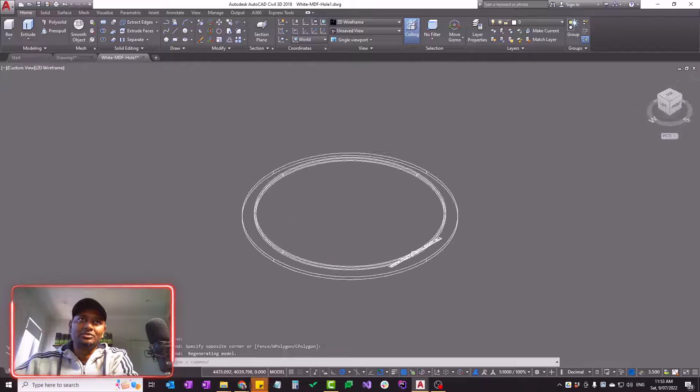So first thing is, you can see this is basically a sort of enclosure we're gonna do for one of our furniture products. Let me put it in realistic mode. As you can see, it's got a little extrusion up here that goes inside into the hole, and then this is a portion that people will see. This will be on outside, this will be on inside, and the text we're going to put should be on here, so people can see it from outside. That's what we're going to do.

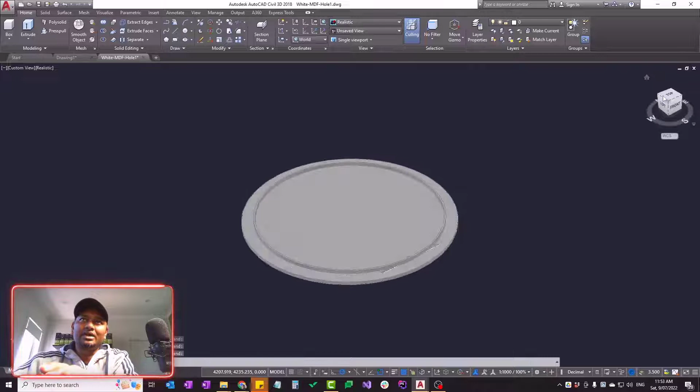Now let's go back again to top view, put it to 2D wireframe, and you can see that is a logo we have. Not a logo, just a little marketing stuff.

So let me move this a little bit and scale this a little bit. We need to center it, but before we do that, we have to make sure we scale it. I think this should be good.

Okay, so it goes like that. Now next thing we're going to do is make sure it is centered.

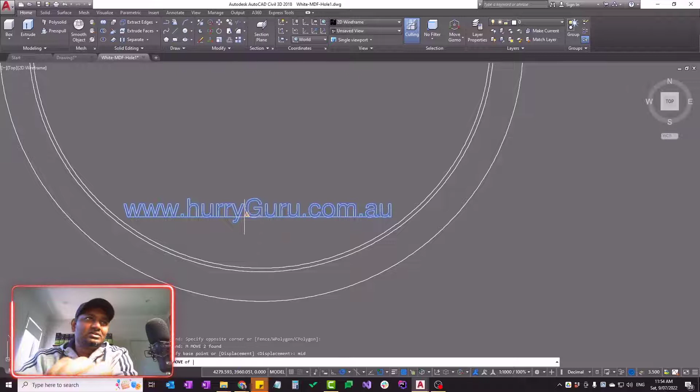So for that, we're going to select it, move. We're going to use mid. We can temporarily use the mid snap using the command mid, and we're going to place it in the quadrant. Snap from the quadrant. Since it's actually a 3D object, I don't think the snap's going to work. So now we can move it up.

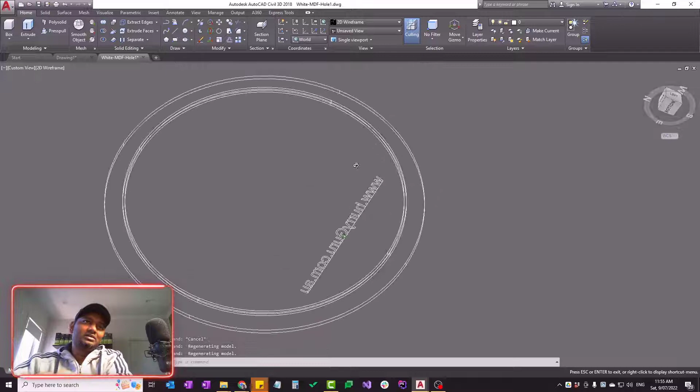Okay, so now we're gonna mirror it. The reason is, if you extrude this way, it's gonna be upside down, the text's gonna be upside down. So now we're gonna mirror it.

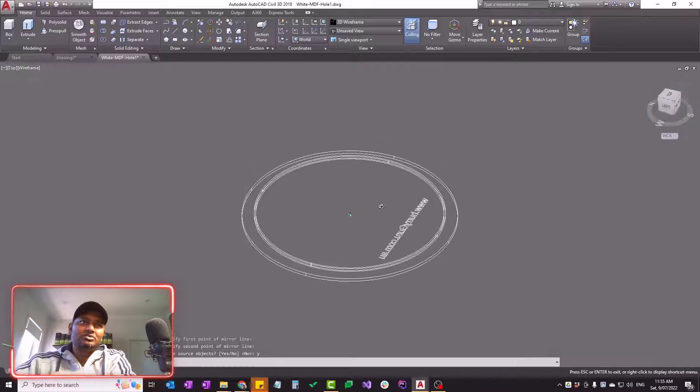We can use a quadrant for this, and we're gonna delete the existing one, so that's gonna be yes. Okay, so that's what we get. Now let's rotate and see. So now it looks right, which is all good.

Now next thing we're going to do is we need to probably extrude it on the other side, not from inside. So for that, we need to move it to the surface.

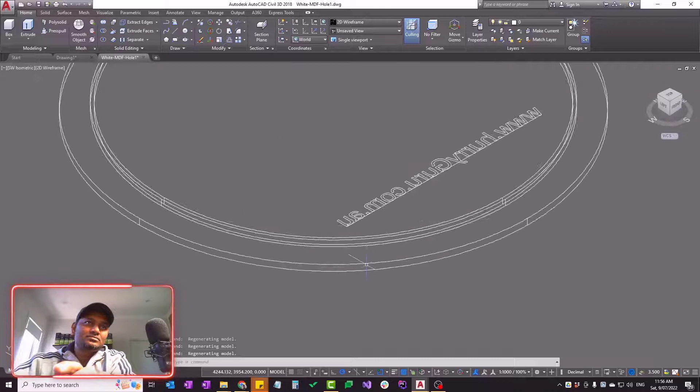Okay, this is the bottom. Go like that. So now we need to move to this line.

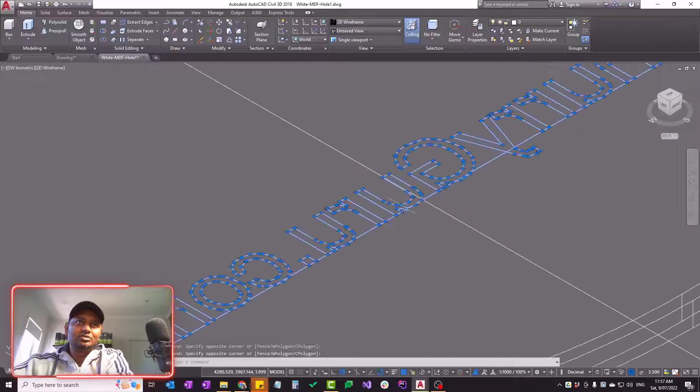So just drew a polyline from the bottommost surface point till the center point. So now we're just going to move this one and snap it onto that. Most cases it should be there. So I'm going to use, let's try mid.

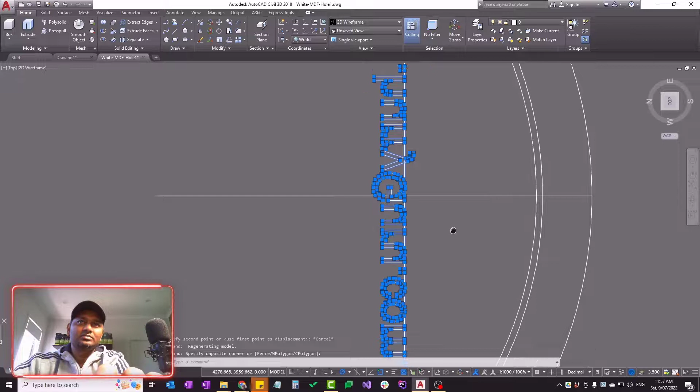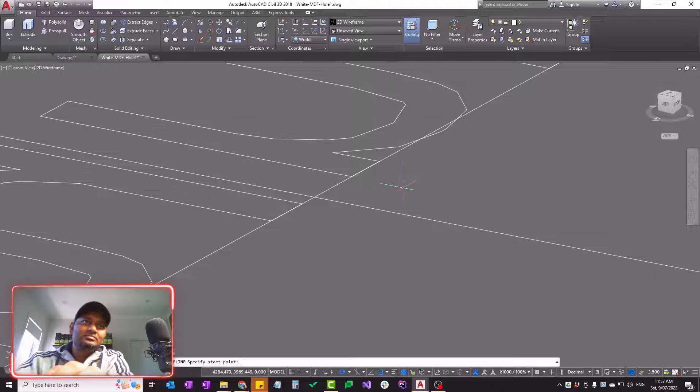Okay, so we just have to get a vantage point to see where we are at. So now we just have to move from here to here. We can center it again if we need it. If you're not going to get a snap, you can use a nearest command, and then we can try and snap it. Okay, so now that looks fine.

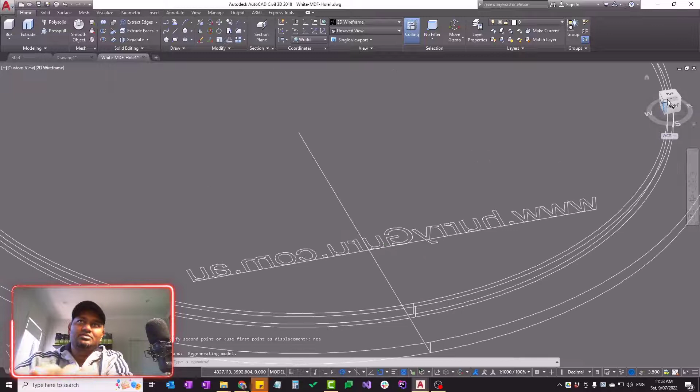So go back to top. Let's center it once more. We're going to use nearest command. Okay, let's check it. That still looks okay. I think that should be all right. Anyway, it's a 3D printer, so it's gonna do the job.

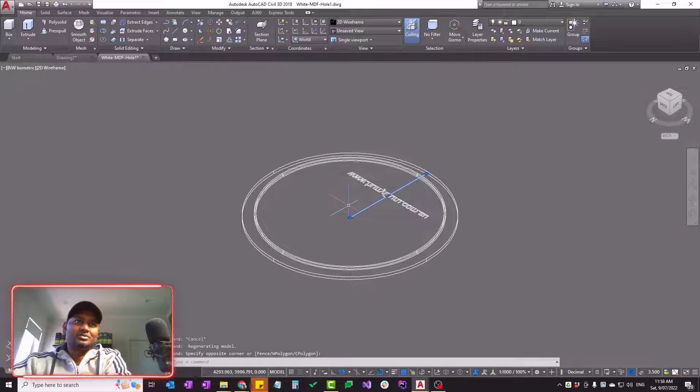Now we need to extrude this one, and for that we're going to use the extrude command, and we're going to extrude in this direction, and the direction is going to be this way, and I'm going to say it's going to be 0.2.

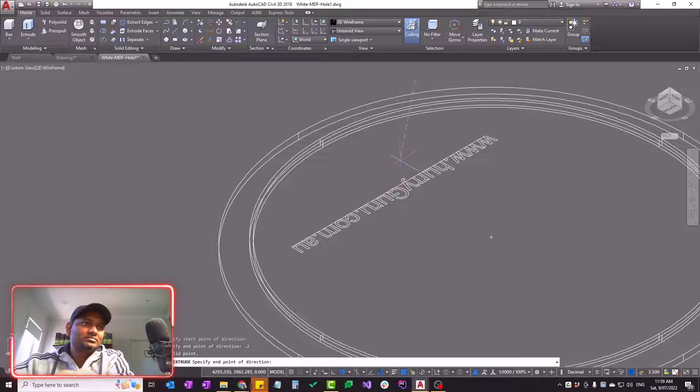Okay, extrude. This is going to be the direction, and the value is going to be 0.2 mil. Okay, so that looks fine.

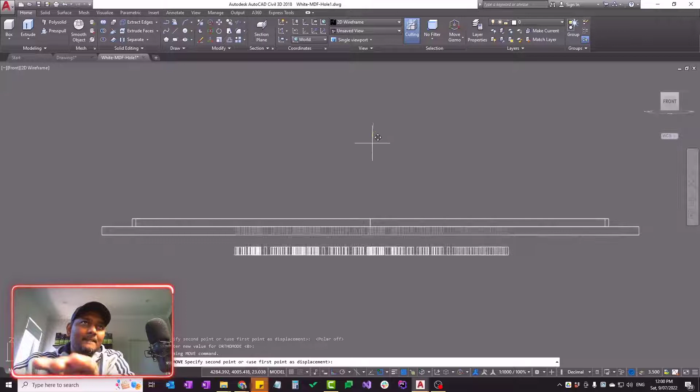Now let's go to the front view, and we can move it a little bit outside. Okay, I think that should be good.

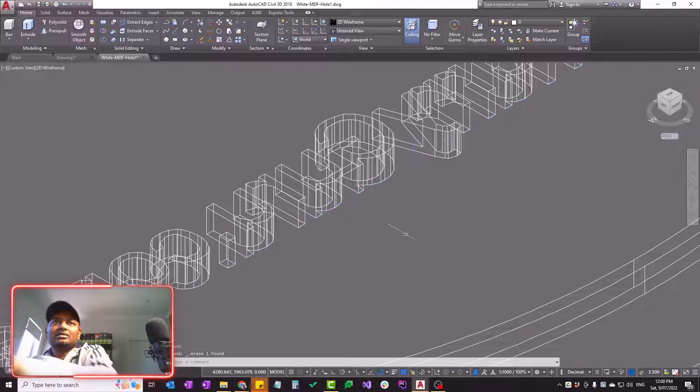Alright, so let's save this one. I'm gonna save this one, and I'm gonna export it other formats. I'm gonna choose STL. I'm gonna say this is for the extrusion that we're gonna use it for one of the holes, so this is gonna be with HG, and save.

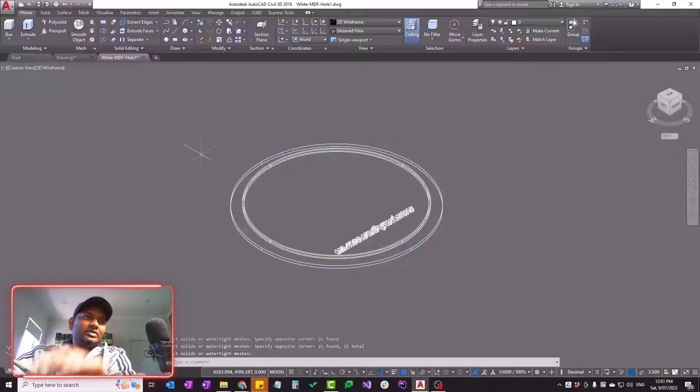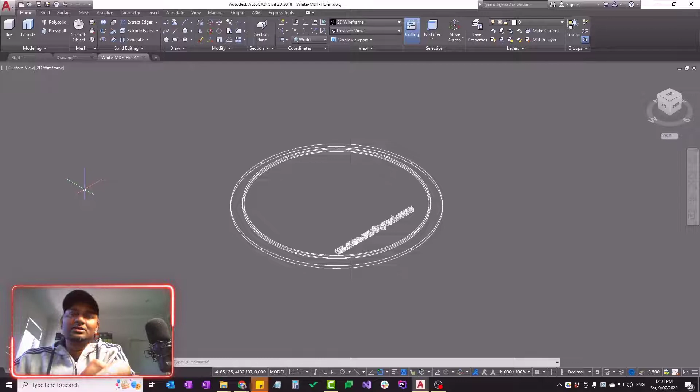Okay, so that's done. So now use Creality Slicer. I'm gonna plug the USB into it. This is a slicing software. Most of the 3D printers come with some slicing software that you can use, and we're going to use this one to check the slicing, check the infill density, and check a preview of it before we do the prints. Also we can set the quality of the 3D printing and a lot of settings, and then we can print.

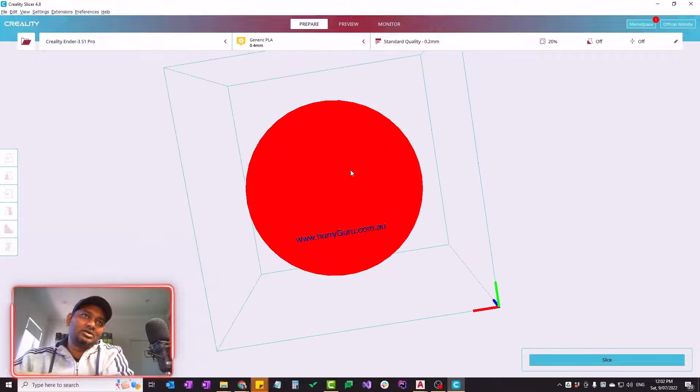Okay, I'm gonna say open, and so this is the STL file that we're gonna use, and we can actually rotate and see it. Okay, so that's how it's gonna be. Make sure the spelling is all right, because the 3D printing takes so much time, so we don't want to waste time on that. So let's try and slice it.

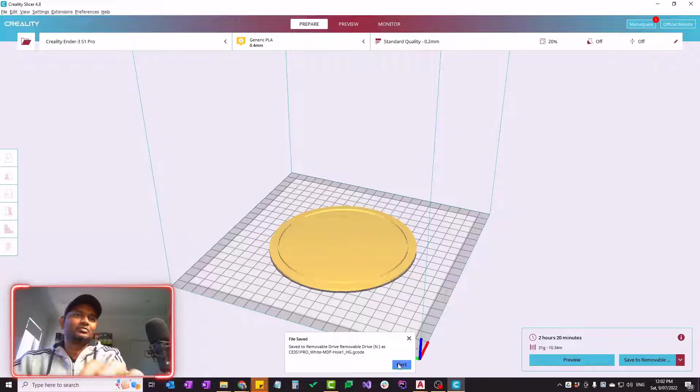So it's gonna take 2 hours and 20 minutes, which is easy peasy. So let's save this to the removable drive, and it's saved. Let's eject it. And that's there. So now let's go and print it.

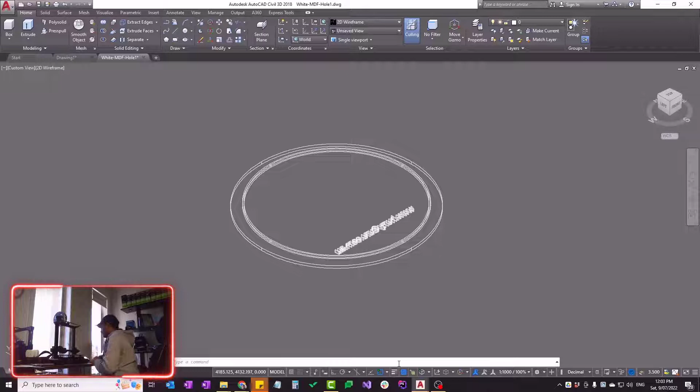I don't know if you guys can see it. So some of the things you guys have to do is not just throw things out there. You have to make sure the bed is all leveled, and the nozzle is all perfectly leveled, and you've got enough material to be used for 3D printing, and then let the bed warm up, and then you can start 3D printing. So let's put this inside.

So I'm going to do some leveling first.

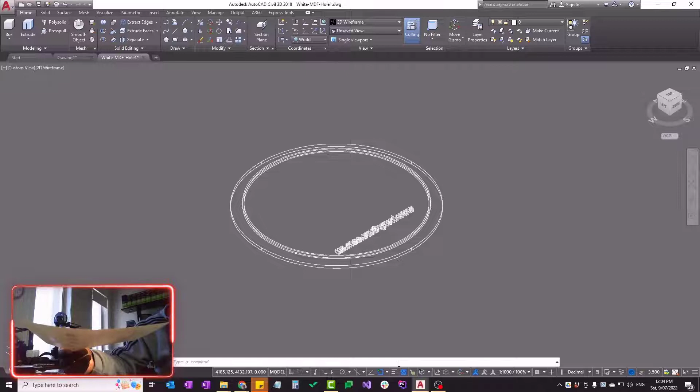So this is the thickness of the paper that you guys should use. This is sort of like a 1 mil thickness or something. So a paper thickness is what we have to use between the nozzle and the bed. That's what we're doing now. So it's all leveled up now. Now let's go and choose the print.

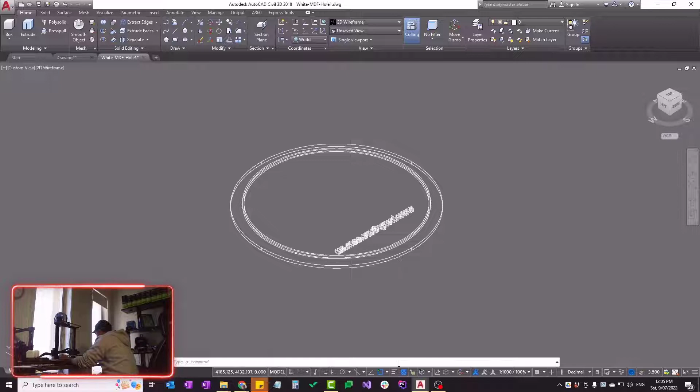I think the file's not copied properly, so let's try again. What we do this time is clear out the files that we have in there. Okay, so I think I just... okay, so it's all good. It just had a prefix into it, so I thought it was an old file. Let's get going.

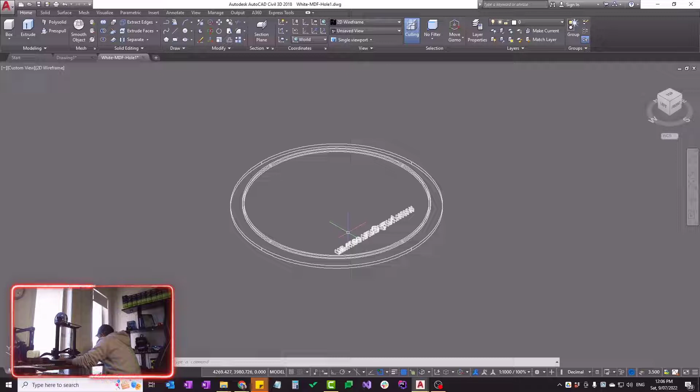Okay, so that's all set. So let's finish the 3D print, and then I'll do another video, and I'll show you how to do a 3D print, and then some review about these printers as well.